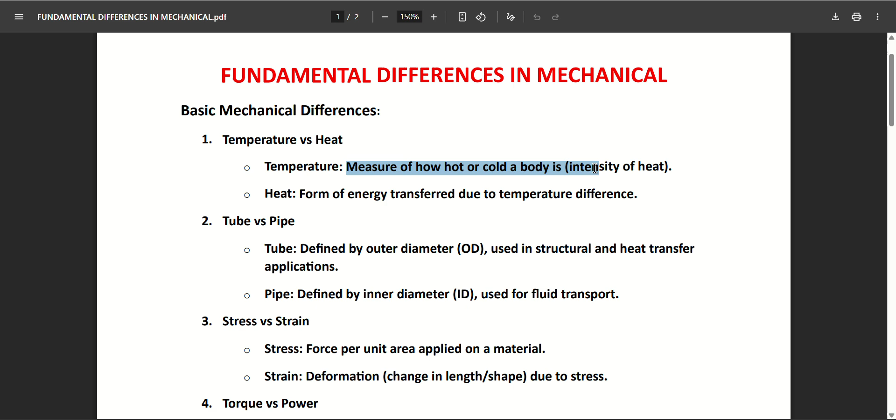One side has some amount of temperature, the other side has another temperature. So due to the temperature difference, energy is transferred. That energy is said to be heat. So this is a basic difference. Simply, temperature is a measure of how hot or cold a body is, and heat is a form of energy transferred due to temperature difference.

The next one is tube versus pipe. As you know, a tube is defined by outer diameter, used in structural and heat transfer applications. In the shell and tube heat exchanger and many condensers, it plays a crucial role in the heat exchange process.

Also, a tube is used in small scale applications. For example, in a vehicle, from the petrol tank to the cylinder combustion chamber, there will be a tube which transmits the petrol fuel. So this is a small scale application. Small scale application means it is used in a small transferring medium. That's a very important thing.

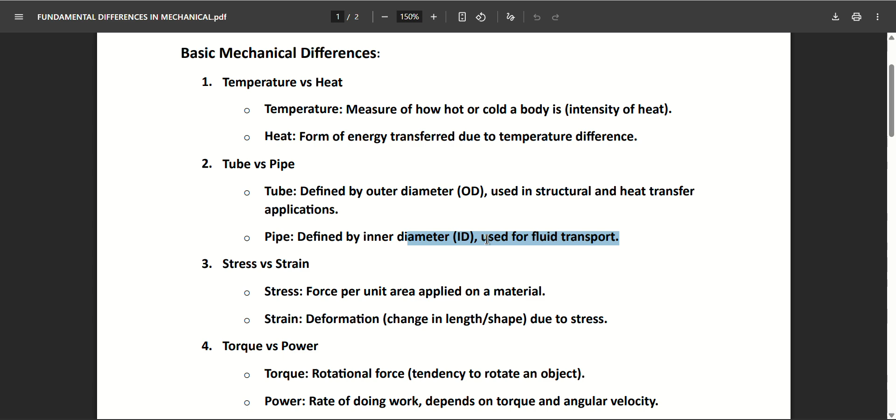Next one is pipe. A pipe is defined by inner diameter, whereas a tube is defined by outer diameter. It is used for fluid transport. So this plays a crucial role in large scale applications.

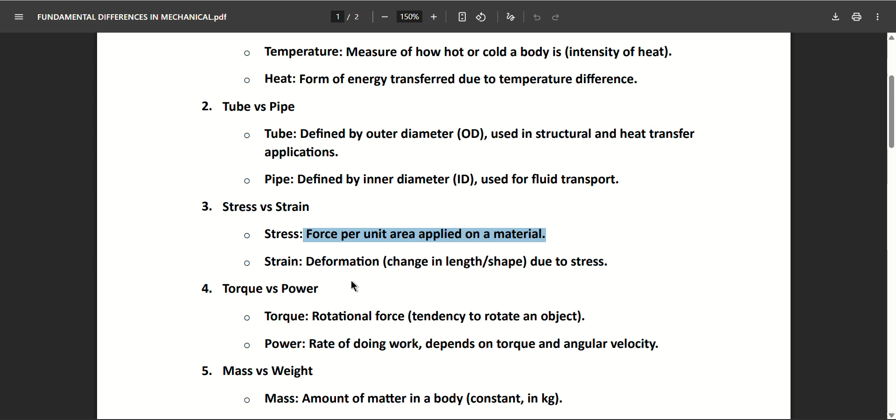Next one is stress versus strain. This is a basic question. Stress is force applied per unit area in a material, and strain is deformation, change in length or shape due to the stress. In strain also we have three types of strain, as you know.

The next one is torque versus power. Torque is a rotational force. You can say it is a kind of twist. So it is a rotational force. Power is energy per unit time; that is the basic definition. It is also said to be the rate of doing work, and depends on the torque and the angular velocity.

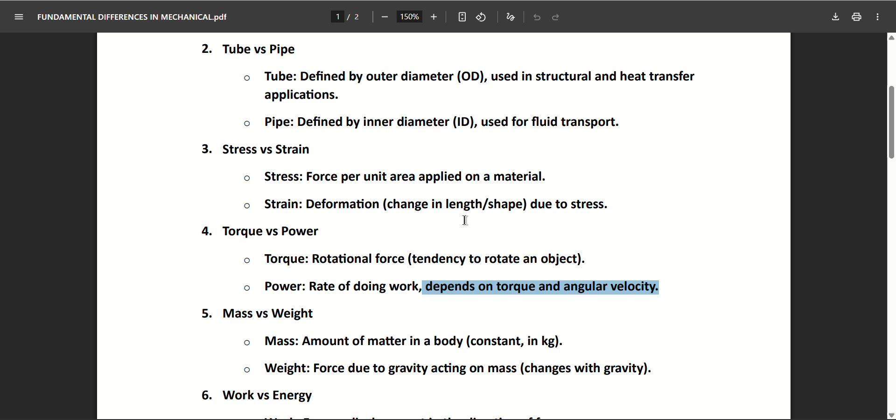For power we have n number of definitions in electrical and mechanical, and in many applications they have different kinds of definitions. So this is a basic difference between torque versus power.

The next one is mass versus weight. Mass is the amount of matter in a body. It will always be constant anywhere. For example, if you go to the moon, the mass will be constant, but the gravity will change. Weight is a force due to gravity acting on mass. Weight is equal to mg. So depending on gravity, the weight will vary.

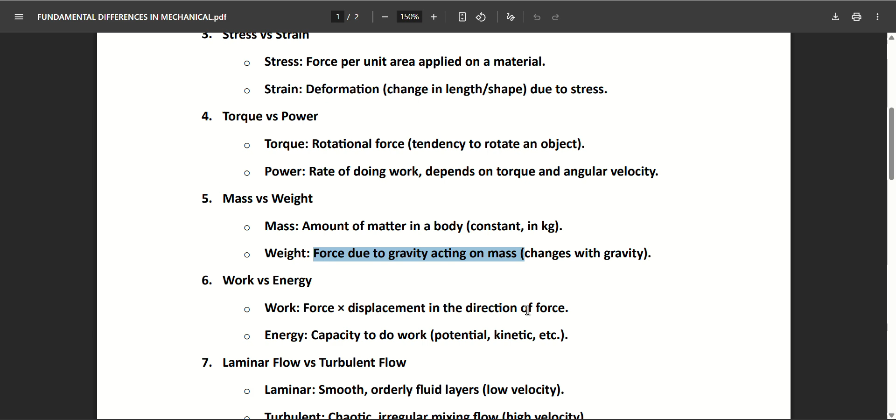The next one is work versus energy. As you know, work and energy have the same unit. So what is the difference? Work is force into displacement in the direction of force, whereas energy is the capacity to do work. It can be potential energy, kinetic energy, etc. So this is a basic difference.

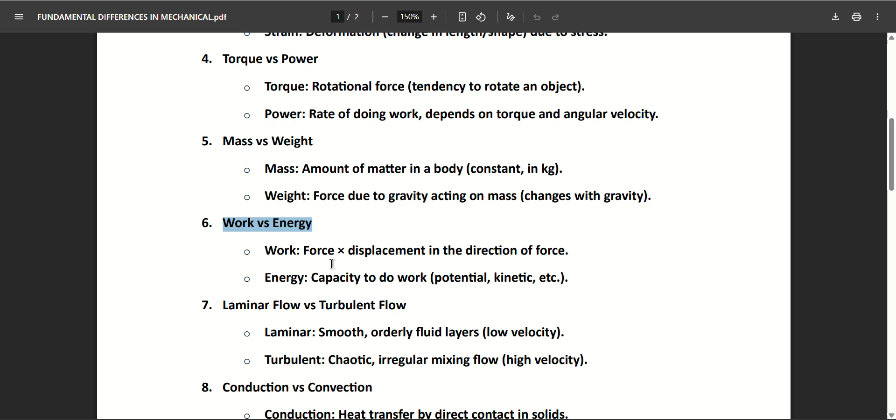If they ask about work directly, you can write the formula as force into displacement in the direction of force, whereas energy is the capacity to do work. That's a very important thing.

Laminar flow and turbulent flow is a very basic question in fluid mechanics. Laminar flow is smooth, orderly fluid layers, which has a structure, a boundary layer, and a velocity profile that is parabolic in nature, whereas turbulent flow is chaotic, irregular mixing flow due to the high Reynolds number.

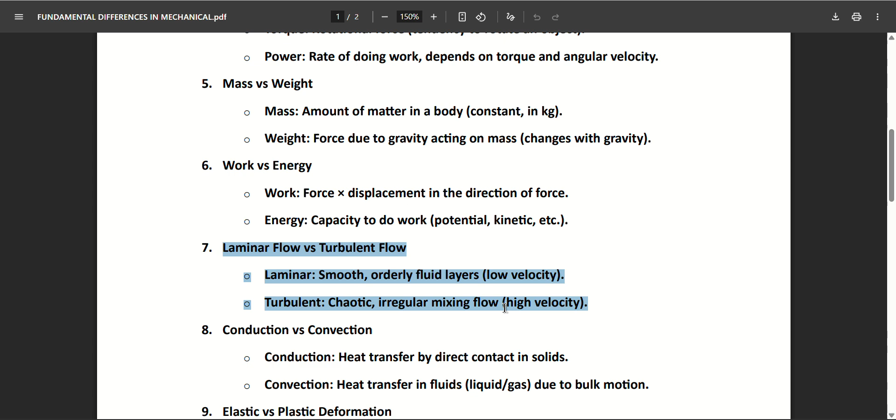It has a high velocity, whereas laminar has low velocity. So turbulent has a high velocity. It has a linear, sorry, it has a constant velocity profile for turbulent.

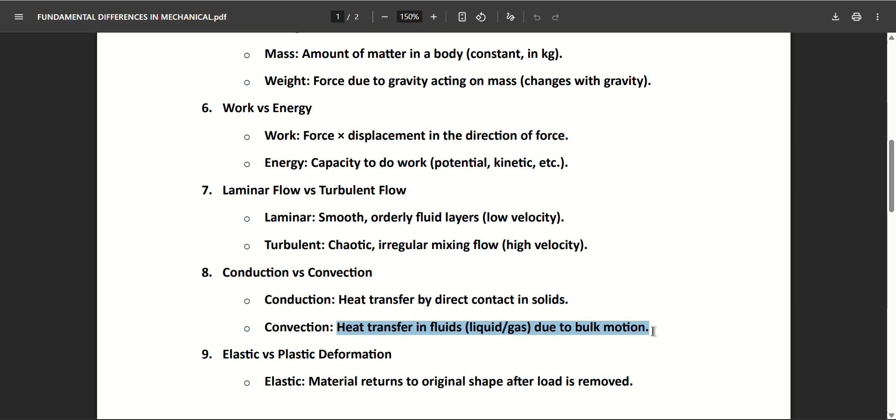And then conduction and convection. Conduction happens only in solids, whereas convection happens in liquids or gas, wherever a molecule is moving. So that is said to be convection.

Next one is elastic versus plastic. Elastic means a material returns to its original shape. For example, if you take a rubber band and stretch it by giving some amount of force, after some time it will return to its original shape. So that is said to be elastic. Plastic means it will not come to its original shape again. There's a permanent deformation after load removal. That's a very basic difference.

And then open system and closed system. An open system can exchange both mass and energy with the surroundings. Example: boiler. For boiling, we are using external energy, fire, and then mass is also getting transmitted from liquid to vapor, and energy is also getting transmitted.

Then in a closed system, only energy is transmitted. We will give heat in terms of fire or any kind of fuel we are using, but the mass will not be transferred because it is closed. So that mass will not be transferred as vapor. Example is a piston cylinder without leakage, in real-time applications.

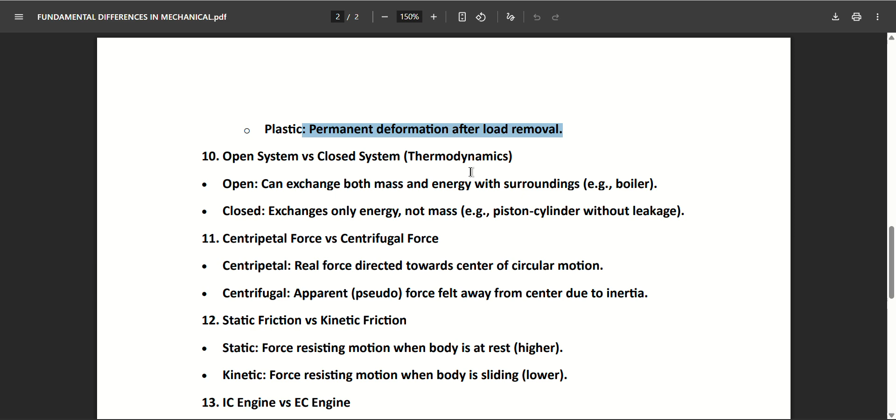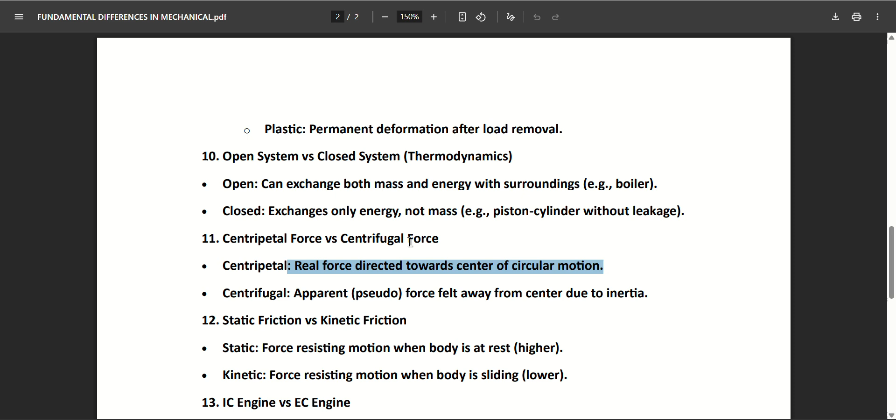And then centripetal force and centrifugal force. Centripetal force is a real force directed towards the center of circular motion. That is a very important thing. Whereas centrifugal force is an apparent force felt away from the center due to inertia. As you know, in the centrifugal pump, due to the force felt away from the center of the axis, it will experience some amount of force. That force is said to be centrifugal force, and it's also said to be a body force as well.

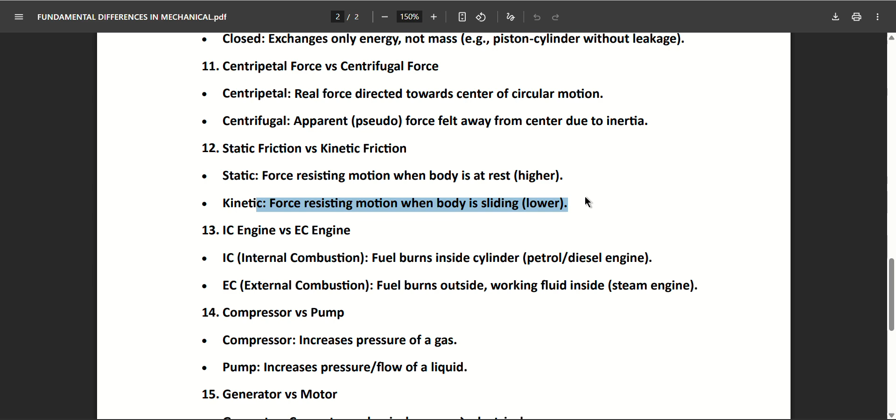And then static friction and kinetic friction. Static friction is the force resisting motion when the body is at rest. For example, if you keep a note on a table, that note will experience some amount of resistance to motion. That friction is static friction. Kinetic friction is the force resisting when the body is sliding. And for rolling friction, when the body is rolling, you will get a rolling friction against it. This is a basic difference.

An IC engine and an EC engine. IC engine, internal combustion engine: fuel burns inside the cylinder, as in day-to-day vehicles, petrol and diesel engines. External combustion engine: fuel burns outside. It's a steam engine, steam boiler, steam turbine. Gas turbine is also an external combustion engine.

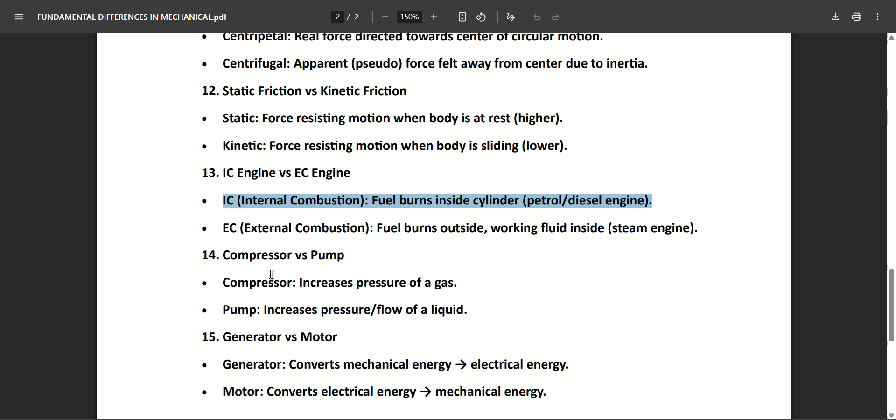And then compressor versus pump. This is one of the important questions. A compressor increases the pressure of the gas. We use it in day-to-day applications. The compressor takes gas from the atmosphere and compresses it with the help of the piston. It may be a single stage or double stage compressor depending upon the application. The gas is compressed to high pressure, so it can be used further in a CNC machine and many cleaning processes as well. A pump is used to increase the pressure and flow of a liquid. That's a very important thing.

And then generator versus motor. A generator converts mechanical energy into electrical energy. For example, if you are using a generator at home, it is used mainly for making electricity. So a generator converts mechanical energy into electrical energy, and a motor converts electrical energy into mechanical energy. So vice versa.

At home, we are using a motor to transfer water from the base level to the tank. For that, we give electricity by switching on the switch. Due to the electric energy, it will make movement in the rotor, and it is converted into mechanical energy. That is a very important basic thing.